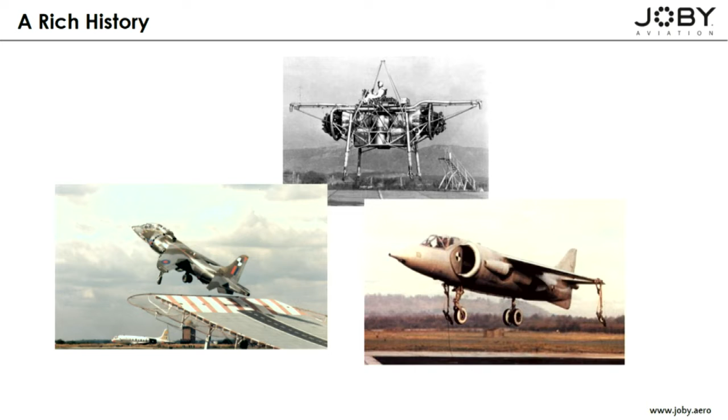So with that said, let's start with the story of the flight control system for the F-35. Of course, the UK had a long history of research and development in VTOL. You can see the flying bedstead there at the top, and then of course the P1127 bottom right, leading to the Harrier. The Harrier was a huge triumph in aviation, arguably the only successful STOVL fighter, or VSTOL fighter, certainly the only successful one in the West. And the great news about the Harrier was the simplicity of its engineering, that with only one extra lever in the cockpit, as my mentor John Farley used to talk about, the addition of only one extra lever turned a regular fighter from a flight control perspective into a vertical takeoff and landing aircraft. Tremendously ingenious mechanical engineering throughout that vehicle, not a digital computer in sight.

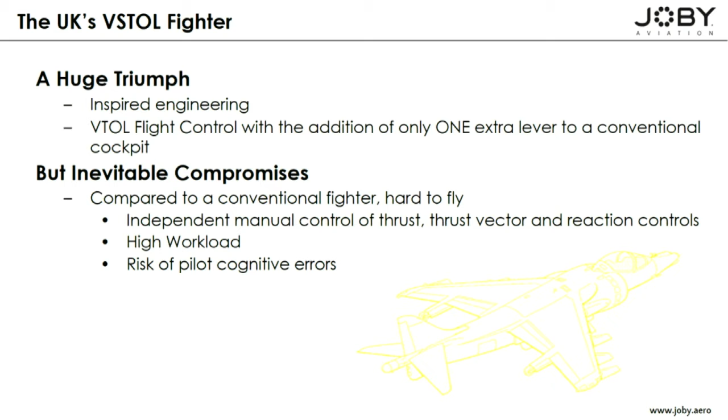But there were inevitable compromises in the aircraft as a result of this. The pilot had independent manual control of the throttle, the thrust magnitude, and the thrust vector angle, the nozzle lever. So it was a high workload aircraft with the risk of cognitive errors being made by the pilot. And you're going to see one here. This is an air show about 10, 15 years ago. A very experienced pilot, the squadron air show display pilot, in a 100% serviceable, functioning Harrier off the south coast of England. Nothing wrong with that aircraft at all until now.

So a perfectly good aircraft thrown away by an experienced and capable pilot due to cognitive error. He pulled the throttle back instead of the nozzle lever. Sounds like an obvious error to avoid, doesn't it? But he's not the only person to have done it, and it's not the only form of cognitive error.

So we have a great capability in the Harrier, or had, but we had an accident rate in the takeoff and landing regime that was an order of magnitude higher than the accident rate for equivalent conventional takeoff and landing fighters. A 10-fold accident rate for takeoff and landing.

We had a significant training burden. The Harrier training course, you came out of the training system with your wings, went to the Harrier. It took 8 months to graduate as a Harrier squadron pilot. Compare that to equivalent conventional fighter aircraft, about 3 months, 3.5.

So significant training burden. And then we carried operational limitations, both in terms of having less good weather minima compared to, for example, a helicopter, which you could argue might have similar weather minima, but we were less able to cope with bad weather in the Harrier because of the high workload.

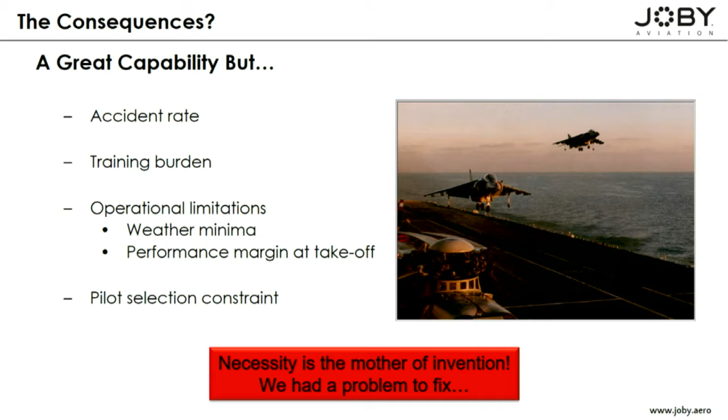So necessity is the mother of invention, as the proverb goes. We had a problem to fix. And so we, the US and UK governments, that were both operating Harriers by the 1980s, set out to fix it. I picked up this program in the mid-1990s.

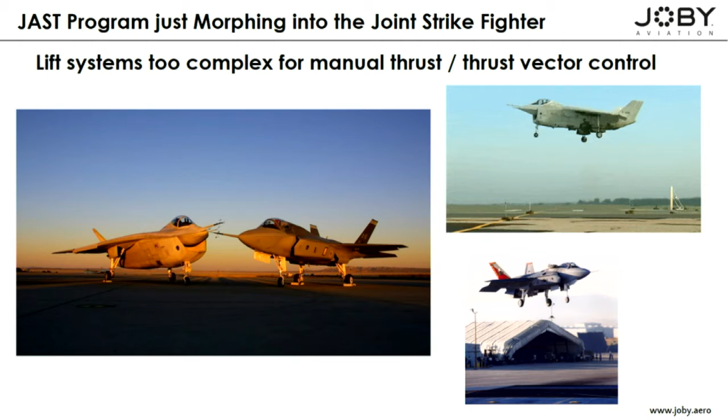The Joint Affordable Strike Technology Program was just at that time morphing into the Joint Strike Fighter Program, where we were going to have complex lift systems that were going to be digitally controlled. There was no option anymore for a simple mechanical lever between a nozzle lever in the cockpit and the thrust vector angle.

But we didn't start from scratch. There'd been a lot of work done through the 80s and early 90s. But from 1986, for 10 years, there was a joint aeronautics program between NASA and the Royal Aircraft Establishment in the UK, both countries pursuing VSTOL, advanced flight control research. Shared facilities, shared data. You see at the bottom there the NASA VSTOL systems research aircraft, and to the right, the VAAC Harrier that I'll be talking about a little bit more.

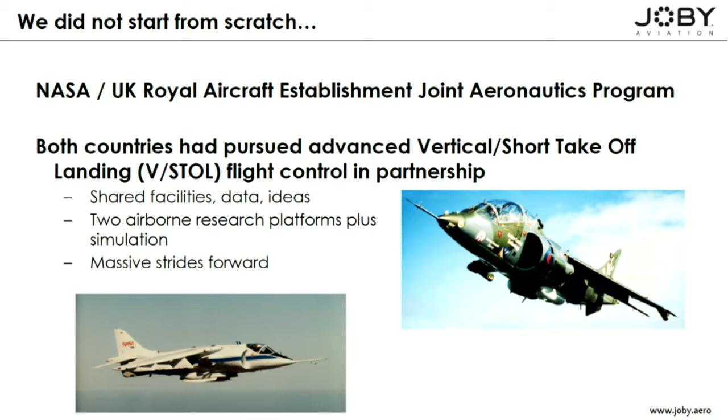So up until 1996, when I'm going to pick up this story, there'd been a lot of work done. And what had we learned in that period of time? What did we know already from the research that had gone on up until 1996? The first thing we'd learned very, very clearly, unequivocally, is that decoupled axes greatly reduced pilot workload.

By decoupled axes, I mean if you look at a coupled axis in a normal airplane, if I push the throttle forward, I go faster, but I also climb. So the axes are coupled. And what we found is by decoupling the axes, so if I make a command to the airplane to go faster, my flight path doesn't increase. I don't have to retrim as I go faster. By decoupling the axes and allowing the pilot to handle one axis at a time effectively, we greatly reduced his workload.

We also found that higher levels of augmentation reduced workload significantly. And by that I mean you give the pilot control of the output variable that he's intending to control. So you give the pilot direct control of speed or acceleration, or you give him direct control of flight path angle or flight path rate, according to the task at hand. You'd never want to give him control of the elevator or the ailerons and have him perform the control loop around getting the response out of the aircraft that he wants.

Particularly fine work from NASA in some of these areas, and they came up with translational rate command, which I'll talk about in a little bit, which is now almost universal in hovering aircraft, and developed at NASA Ames with some really stellar work from the guys there.

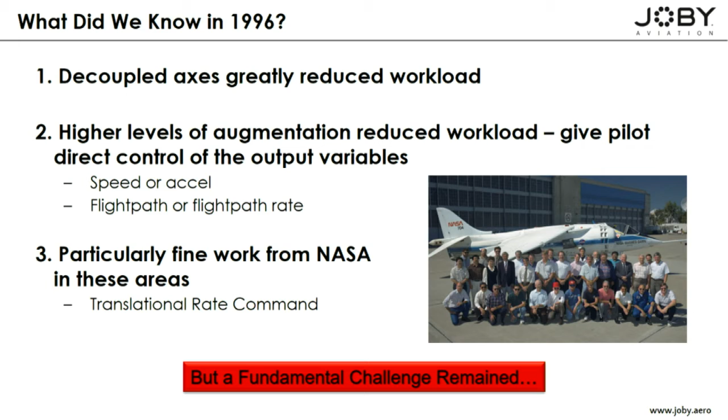So that's what we knew in 1996, but there was a fundamental challenge that remained. And that is that a VSTOL aircraft is really two vehicles in one. Hover and forward flight are two fundamentally different flight regimes, not only in engineering terms, it's obvious, but in terms of the task that the pilot is trying to accommodate.

In wing-borne flight, he has a vector to control. He's going up, down, left, right with his vector, and now how fast he wants to go. But he's controlling a vector through the air. Whereas in the hover, the pilot is now controlling a position over the ground, an XY position control with a secondary height channel control margin. He's not trying to control a vector, but a position, and in a completely different plane.

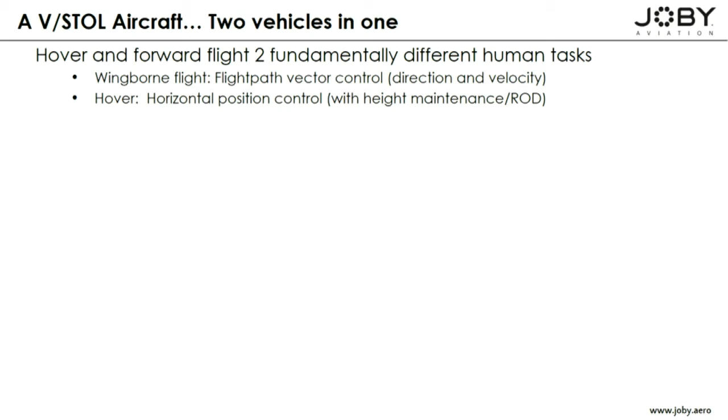We look at the flight path control plane is like this. The hover control plane is horizontal.

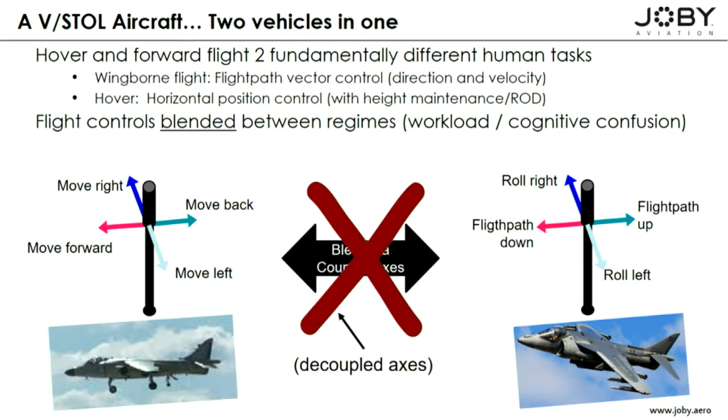It also arises in higher workload for the pilot because he's having to manage a changing vehicle, and brings cognitive confusion into the game as well. Now, as soon as we decouple the axes, we can't do that anymore, which is no bad thing because we've already decided it's a high workload task, but it also now becomes impossible. Remember, we'd already decided, previous to 1996, decoupled axes are better. Well, if we're going to decouple the axes, we cannot do what the Harrier or the helicopter does, which is a blended transition with both axes being coupled.

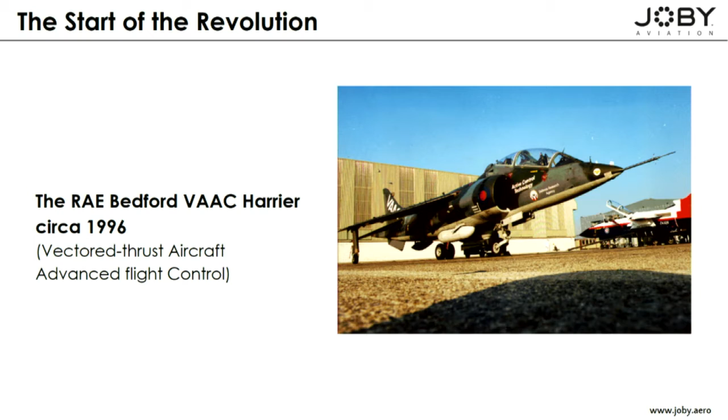So this is the aircraft that we did the work on, the Bedford VAAC Harrier. It stands for Vectored-thrust Aircraft Advanced flight Control, with a soft small T and F to make it an acronym that's pronounced VAAC. That's about 1996, before the color scheme was changed, and that's actually at Boscombe Down after it moved there in 1996. Fairly ordinary on the outside. It's actually the oldest two-seat Harrier still in existence, built in 1969, one of two original development batch two-seaters. After it finished its work with Hawker Siddeley, it was given to the Royal Aircraft Establishment and became a research aircraft.

And of course, the magic's on the inside. It's just a regular Harrier on the outside, and you have a rear cockpit there. That's the rear of the two cockpits, with a variable feel center stick - we later installed an active side stick - and a left inceptor quadrant that could be pulled out. By inceptor, by the way, I'm just talking about a throttle or a stick, something the pilot holds to make inputs to the flight control system - these are generically called inceptors.

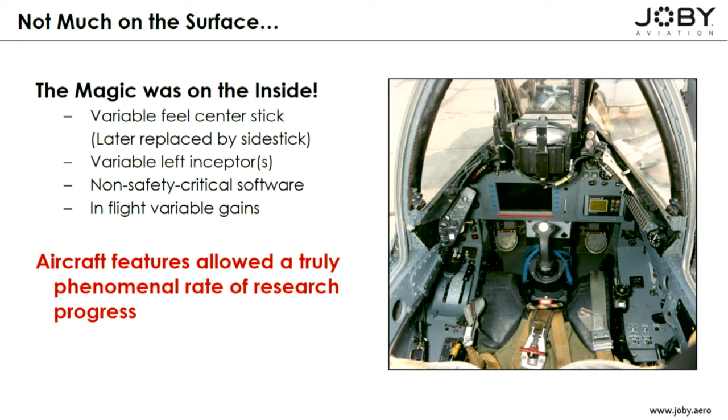But the main thing about it was that we had non-safety critical software. So we could not only turn around a software build in the morning, load it on the airplane and go fly it immediately without any regression testing or safety testing, but actually in flight, we could sit in the rear cockpit flying in the hover and adjust parameters within the flight control system. We could vary a feedback gain, a command gain, or anything else we wanted, turn features on or off, real time in flight - made it very, very fast to make progress. We just can't do that with normal flight control, with all the safety mitigation and regression testing required every time we roll software. But a very, very flexible tool.

So what then did we do with it? Remember the fundamental challenge I introduced a couple of slides ago is linking the hover with wing-borne flight, and doing it in an intuitive, low workload manner that works for the pilot. How do we link the hover and wing-borne flight regimes in this kind of aircraft?

Well, we identified candidate solutions. So we did a lot of brainstorming. We looked at the work that had been done before and the different implementations. We looked at different aircraft types. Of course, most of the mechanical had some kind of coupled axes, but we could still draw lessons from them. We came up with essentially two main types - there were actually three to start with, and we threw one out after fairly early flight testing.

And we ended up with two fundamental overarching solutions. You either change what you do between the two regimes - so you might have a conventional fighter, fast, slow, up, down in wing-borne flight, and then when you get to the hover, somehow you engineer a change so you've now got up, down on the throttle like a helicopter or Harrier, and left, right, up, forward, back on the stick. Without going into further details - it'll be in my written paper - you have to introduce a third inceptor to do that. But there is a way you can do that with decoupled axes if you introduce a third inceptor. Or you go for something different.

You go for something where you unify the response of the aircraft to the cockpit inceptors, irrespective of speed. We called it Unified Flight Control. It was actually invented in 1980 by Peter Nicholas, one of the guys that worked a lot on the Joint Aeronautical Program.

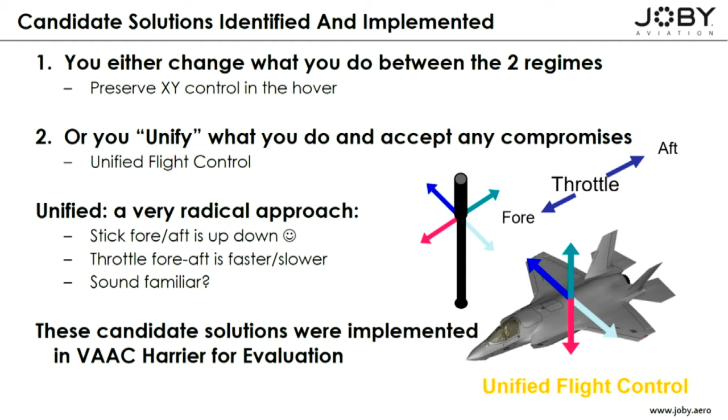So these candidate solutions were implemented in the VAAC Harrier for evaluation, and this is the key: the experiment was piloted evaluation of handling quality tasks. When you do a piloted evaluation of tasks, it's very important to get the task and the experiment set up right, because if you get it wrong, human beings are very subjective — you can easily swing the results one way or the other. So the task definition is crucial.

You have to come up with a task that is, number one, relatable to the mission or role the aircraft's going to have — representative, not some kind of artificial task. And you need to generate a task where the pilot will be operating in what's called high gain. A human being has a gain in the same way a control system has a gain, and human beings can become high gain controllers in different environments — normally when the visual cues are more compelling, or when there's more stress, or when there's a tighter tolerance required on human performance.

We need to go to high gain because it's high gain tasks that elicit the deficiencies in any control strategy. We needed to make the tasks representative, but also ones which would test the parts of the flight control strategies we were looking at in the most demanding way. We wanted to probe the weaknesses in each of these strategies.

We used an industry standard scale, the Cooper-Harper Handling Qualities Rating Scale, designed in the 1960s in a NASA report — very much industry standard, nothing particularly new there. And we used multiple test pilot evaluators. Trained test pilots are trained to be objective, at least as much as possible, and we had both Harrier-experienced and non-Harrier-experienced test pilots flying these tasks.

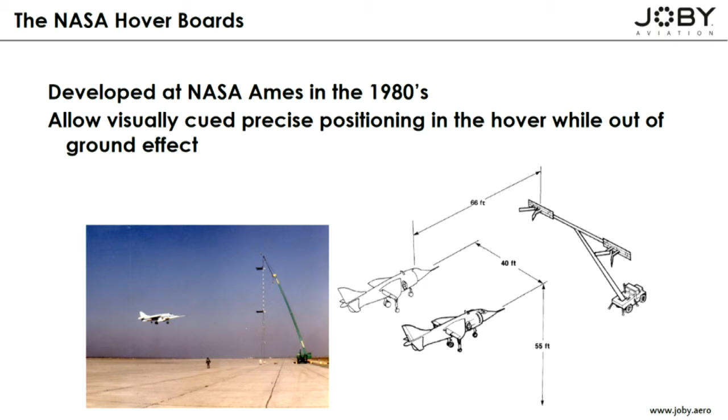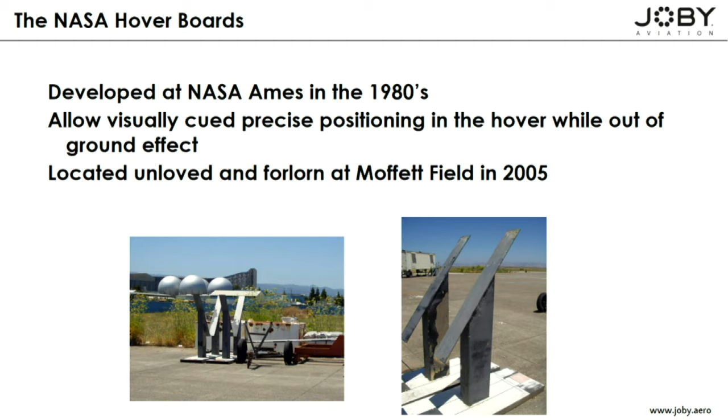And we found them on a dusty corner of Moffett Field, looking a bit sad and unloved. We shipped them over to the UK in a US Navy C-130, painted them up, and put them back into action, which was rather nice to do.

And we also took the vehicle to sea. Her Majesty's Navy gave us access to HMS Invincible on a couple of occasions, so we were able to perform tasks at sea as well. The advantage is that the task is naturally high gain on a rolling, pitching deck at sea — you've got superstructure very close to you, you're much lower and closer to the deck as you come across it, and it's a much higher gain task for the pilot. So it was a great place to evaluate our control strategies and compare the two we were looking at.

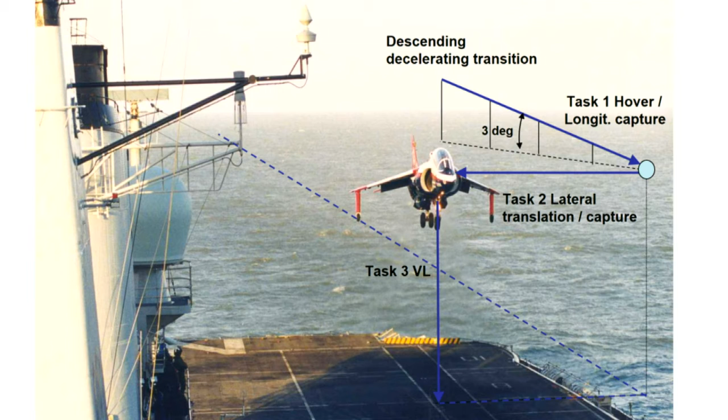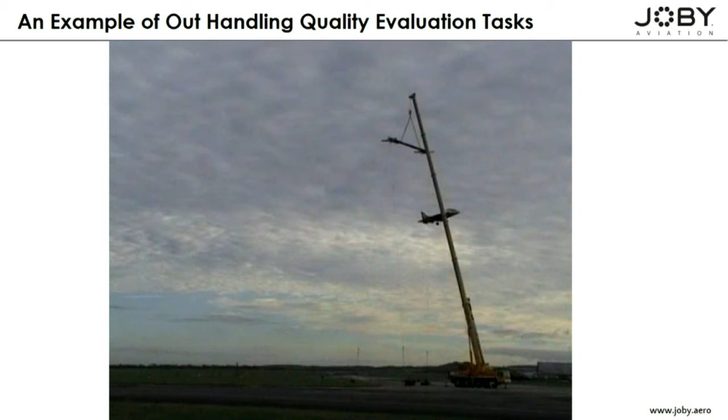And there were different sections of tasks. This first task was basically a longitudinal position capture, simulating coming into the hover and stopping abeam the beam, if you like. The next task was a lateral position capture, and you'll see the aircraft in a moment cut across and capture those targets.

There's a lot more noise in real life, of course. This is before the era of GoPros and so on, so we had to put a camera at the top of that beam. Then there's the problem of remotely switching it on. Back in those days, we couldn't remotely switch the camera on, so we tried to persuade one of our flight test engineers to go up onto the top of the crane and the beam, but sadly he refused, so we just left the camera running.

In a moment, you'll see the aircraft begin its descent to the pad. That shows about 3 or 4 tasks the pilot was undertaking, and we'd run him through identical tasks using the different control strategies. He's now just positioning for a final landing, which you'll see in a moment. On this final landing, the intention is for the pilot to put his head in the middle of the square pad you'll see in a moment. So it's not to put the vehicle in the middle, but he's trying to put his head in the middle of the pad.

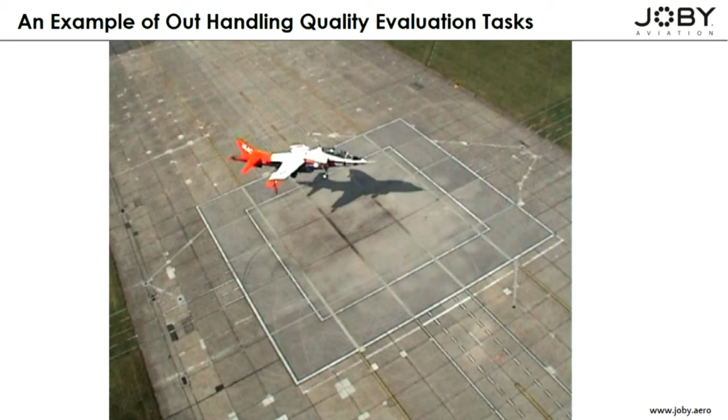So what results did we get? In those few minutes of talking, of course, were years of effort and millions of dollars of our respective governments' money. Unfortunately, with limited time, I can't go into a lot of the details, but I will attempt to put them in the written paper. The summary, cutting to the chase here, is that the results strongly endorsed unified flight control.

We anticipated difficulties with unified control for the XY position control in the hover. Everyone said it's much better in the hover to have XY position control on one inceptor—go forward, back, left, right, or at a 45-degree angle. Very intuitive, very simple. If you split them between 2 hands, forward and back here and left and right here, that's going to be harder. Well, we simply didn't see that as a challenge. If there was a degradation in handling qualities or increase in workload, it was very, very small, and easily outweighed by the massive cognitive advantages of the simplicity of the control strategy.

The pilot knew whatever speed he was at, or if he didn't know what speed he was at, he knew that if he pulled back on the stick, his flight path would go up or his height would go up. And if he pushed forward on the throttle, he would accelerate along the flight path vector. So this was very strongly endorsed and backed up by a wealth of in-flight research data that, as I said, I can't really give you a lot of the meat and potatoes of in this presentation.

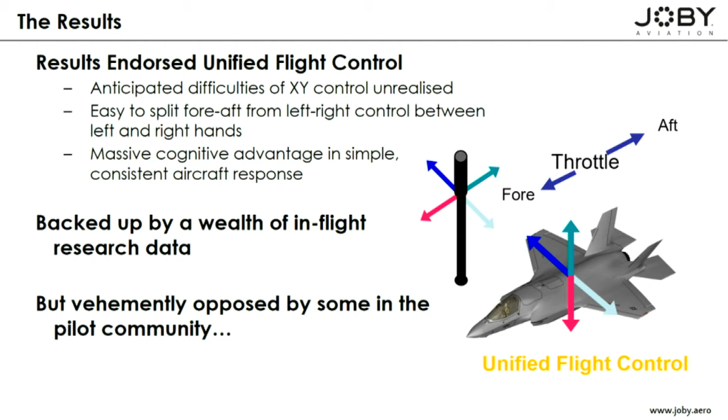However, it was vehemently opposed by some in the pilot community. And this is turning to the topic I'd like to cover through most of the rest of my presentation, because this is a really excellent example of predisposition and paradigm. This was vehemently opposed by some, and a bitter debate ensued as a result of it.

The legacy control community, if I can call them that—people who were used to helicopter and Harrier-style controls—just couldn't accept that they could get away from an XY control in the hover on the sticks. They can do a 45 left or right, and everything's nice and intuitive on a single stick. They couldn't understand: I pull back on the stick and the engine spools up—that makes no sense at all. And if I want to do a 45 translation, I've got to use 2 hands. So these were the sort of arguments raised, and there were some that would not be persuaded.

After 2 or 3 years of fairly emotional debate—and it literally was 2 or 3 years as the results and data came out—many of these pilots who argued against it were our subject pilots in the experiment as well. A grey beard panel was convened by the Joint Strike Fighter Program Office in 2002. We took 3 or 4 days presenting our various bits of data, and those arguing for other ways presented their data, and eventually, at the end of that week, unified was chosen. But it did feel a little bit like this much of the time.

The question, though, is, were we right? And of course, the jury is now in. The F-35B has been in operation for some years, and I'm going to cover that in just a moment.

Before I do, though, I'm going to show you a bit of footage, and there is some sound on this. I'll let the pilots chatter away, you'll hear they're quite happy. This is Peter Wilson, who's been flying the F-35 the last 10 years, and has just joined Joby Aviation as well. And Chris Gotka, Sea Harrier test pilot, who's the safety pilot in this evaluation. So Pete Wilson is the subject pilot, and Chris the safety pilot.

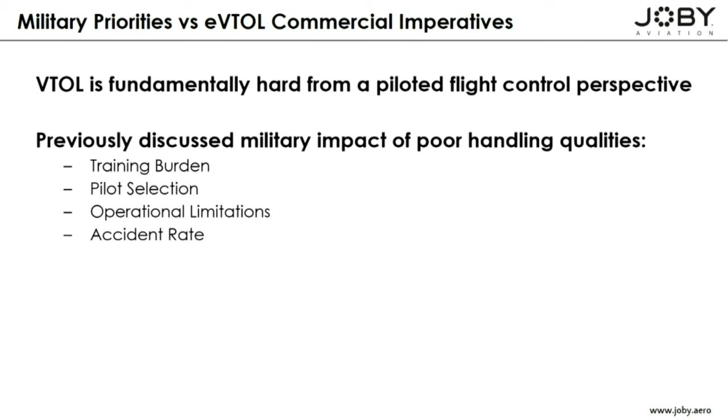What does what we did before mean for eVTOL? We talked earlier about military priorities, and in urban air mobility we've got commercial imperatives. VTOL is fundamentally hard, we already established that from a piloting perspective. And those issues we talked about the military facing - training burden, pilot selection, operational limitations, and accident rate, especially the last - apply even more so in the civil world of urban air mobility. So we have an even greater imperative than the military did to do this right.

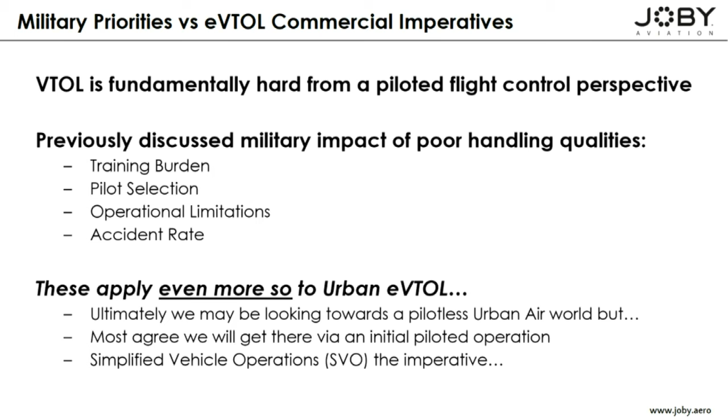People talk about autonomy, and we are moving towards autonomy. Who knows when? We can all have our different estimates of when we'll have autonomous vehicles flying passengers. It'll come at some point, but there's very few who would argue we're going to start with autonomous flying taxis. We're going to start with piloted flying taxis. Simplified vehicle operations, mitigating those problems inherent to a high workload task such as VTOL flight, are absolutely essential for us in the industry.

It's interesting to note this is not just about VTOL. These concepts of highly augmented control, of giving the pilot direct control of the output variables he needs to control for that task, are spreading throughout aviation.

In the US Navy, we have a flight control strategy named Magic Carpet. This was developed by one of our colleagues on the VAAC Harrier research program. He simply turned the same concepts to a new problem - he took the same ideas we'd proven and developed in the VAAC Harrier for the hover and applied them to the task of landing a fighter aircraft on a moving, pitching, rolling ship at night, which was, until very recently, by far and away the hardest piloting task in the world.

So hard that highly experienced pilots, friends of mine in the US Navy, would go off on a mission, real or training, and if at night, coming back to the ship at night, they'd spend basically the whole hour and a half of their mission worrying about what they had to do at the end of the sortie. That might sound extreme, and everyone's a little different, but there was this significant threat hanging over you. You've got to come back to the ship at night where you can't see anything except this little dot of light, and you've got to close the loop around your glide slope using intuition and raw handling skills.

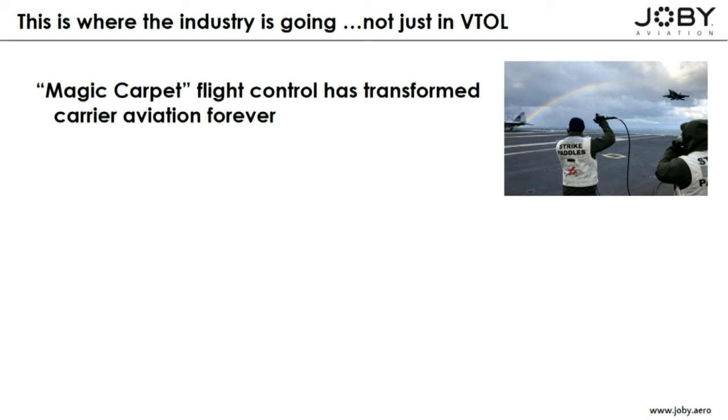The FAA are conducting groundbreaking research, and the EasyFly concept in Flight Level Engineering's variable stability aircraft there, designing not for the pilot but for the operator, for someone who's not a pilot to come in and operate an aircraft safely and easily, radically transforming the ease with which someone can learn to fly an aircraft safely.

So in this context, how can we be thinking old school? How can we be thinking about the way we've been operating for the last 20 years, or even the last 10 years with GPS perhaps? There's still lots of things we're doing where we're denying the pilot the ease and safety that we could give him.

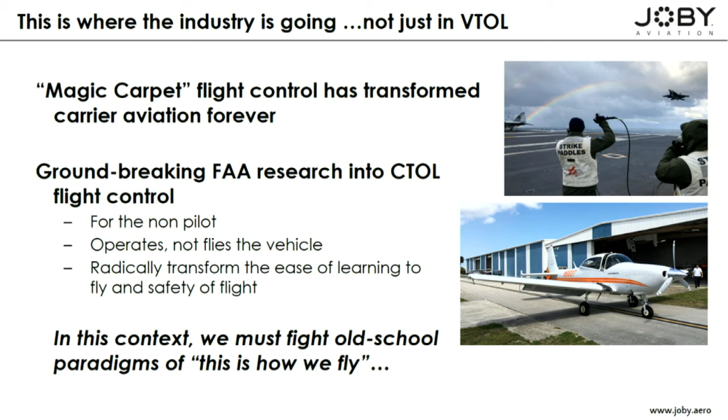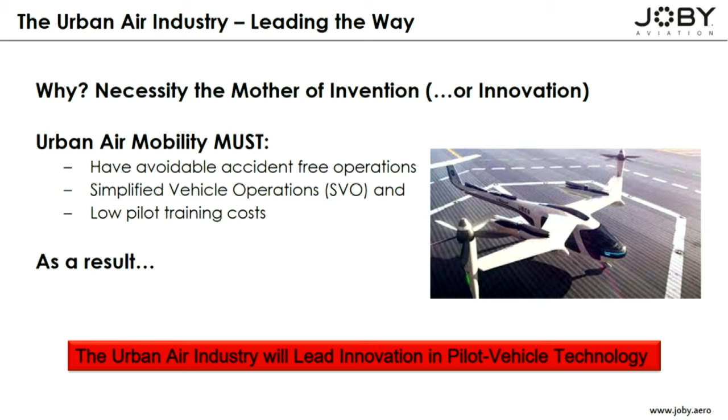Because necessity is the mother of invention, as I mentioned earlier, we had a problem with the Harrier, so we solved it for the F-35. Well, we've got a problem in urban air VTOL because we've got to do it safely, we've got to do it cheaply, we've got to do it robustly. And so as a result, it's my prediction that the urban air mobility world will lead the way in future PVI development, pilot vehicle interface development. Because we're doing it, Joby Aviation's doing it, our colleagues and competitors are doing it too. And it's very pleasing to see, again, because we have to, that we're going to be leading the way in that area.

But the last part of my talk, and I'd just like to touch on part 3, is what about the future? With what we've learned both on the Harrier and the F-35, and with what we've learned with Magic Carpet on the US Navy, and what the FAA are doing with the EasyFly concept, does the CTOL or the Part 25 world now have a challenge to face up to?

The counterpoint is we don't have a problem. Commercial aviation is the safest form of transport on the planet. And it's true, and it's an enviable track record and something to be very proud of. I heard a very senior person in the FAA, just within the last week or two, quoting that in the last 10 years in the National Airspace System there have been 7 billion individual journeys, 90 million commercial flights, and 1 fatality, which actually is not quite true, but let's just say it is.

Is that a relevant statistic? Because you need look not very far to find them. You need only look outside the National Airspace System to find, in last year alone, 534 fatalities. Air France 447 in the South Atlantic, the very famous and tragic crash just 10 years ago this month. So these accidents, they may be outside the US National Airspace System, but they're in our aircraft. They're in US and European manufactured airliners. It's our problem. Not all of them, but a fair chunk of them.

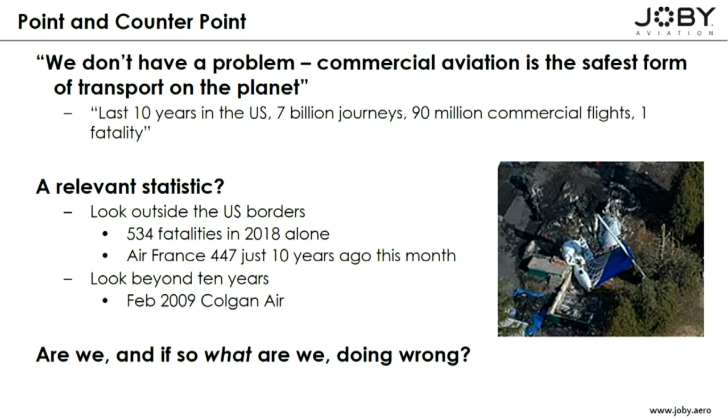And if we look beyond the 10-year point, it was only February 10 years ago that the Colgan Air commuter airline crash happened, when the pilot had a stall warning and pulled back on the stick and pulled back on the yoke in the stall. So I don't think the problem is solved. Yes, it may be the safest form of transport, but we can make it safer still. So if we're doing something wrong, what are we doing wrong?

Well, I think what we're doing wrong is fundamental to the challenge of automation. We need to consider not just the flight control system I've been talking about so far, but the pilot-vehicle interface in general. And with automation, we've made the flying task in a Part 25 airliner really, really easy, 99.9% of the time. And as a result, we've dumbed down the pilot. This may be controversial, but I'm afraid it's true. We have dumbed down the pilot by making his task easy.

You know, call sign ABC, proceed direct, Sierra Foxtrot Oscar. What's he do? That's how we fly today. Call sign 1234, you're cleared the ILS approach runway 28 San Francisco. It's already in the FMS. So we've dumbed down the pilot. And yet when things go wrong, we expect him or her to save the day. It's a deep flaw. Sometimes we get away with it with some exceptional skill, Hudson River. Most of the time we don't.

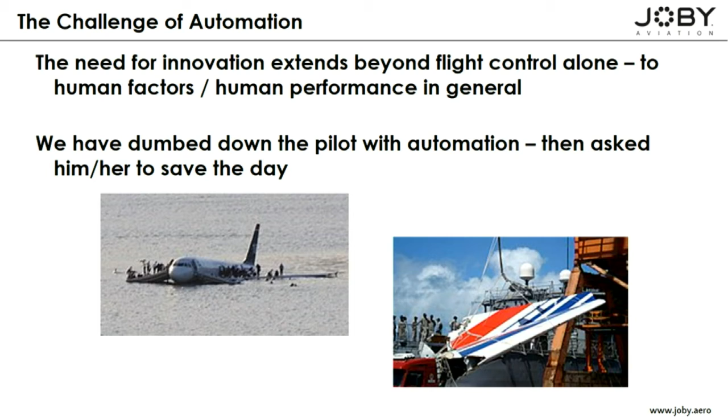So is the solution, as some people are saying, and as some have been saying for years now, to limit automation and give more back to the pilot? So we bring his skill level back up? Absolutely not. That is the dumbest response to what we've seen in these areas.

No, the solution is to do automation right. Is to automate, but to finish the job. The argument is not against automation, it's against partial automation. We can save the pilot from him or herself. We can, as I like to say, wrap the pilot in cotton wool to prevent him or her making the errors that we know people make.

For example, we still have direct link modes in our airliners today. So we have a nice super-duper fly-by-wire flight control system, but if some sensors fail, we drop back to a direct link, a manual flying mode kind of concept. And yet we've been flying 40 years with the F-16 without any fallback manual flight control system. Now every military fighter has full-up fly-by-wire with no direct electrical link, no manual fallback. So why are we still putting it in our airliners?

And we still fail to protect the pilots. I just talked about wrapping him or her in cotton wool, but we still fail to protect the pilot from all the mistakes we know human beings make. A pilot can still run himself or herself out of fuel, fly into the ground, get too low on energy, or just ignore the GPWS.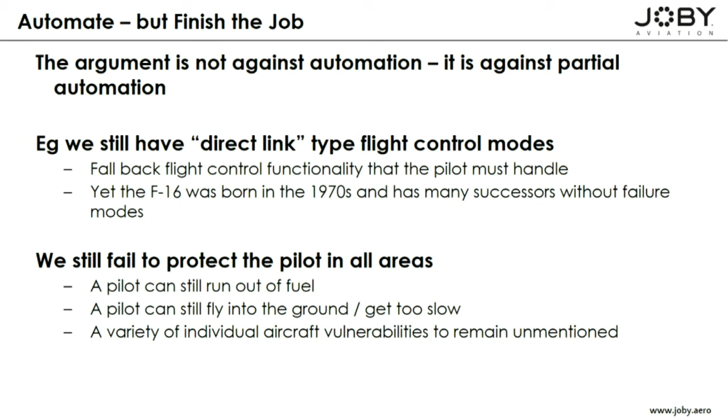But we're failing to protect the pilot from him or herself fully. But we can do so. Full protection is realistic. We understand the human being, and we understand the mistakes and errors that a human being can make.

With digital computers today, and the incredible power we have in them, and the knowledge that an aircraft can have about not only itself but the world around it, makes all of these things practical. We already have the ability to wrap the pilot in cotton wool. It's just a case of approaching the design intelligently with the right objective. In the same way the US Navy approached the carrier approach task and turned something from the hardest task in aviation to something pretty straightforward, by taking intelligent design and digital computers and applying them to the task. And we can do that today.

The disincentive: I was told this by a just-retired, very senior executive from one of the two large Part 25 manufacturers. I won't say which one, obviously. He said the customer doesn't want it. All these things we could do, the customer doesn't want it. So we supply what the customer asks for.

And I think that's poor. It's legacy thinking. It's just like the pilots who, back in 2002, didn't want to accept there was any other way to hover an airplane than having XY control on the stick. We've got people saying, well, this is how we do it. No, this is what I'm used to flying. This is what I want it to look like. This is how I want my autopilot panel.

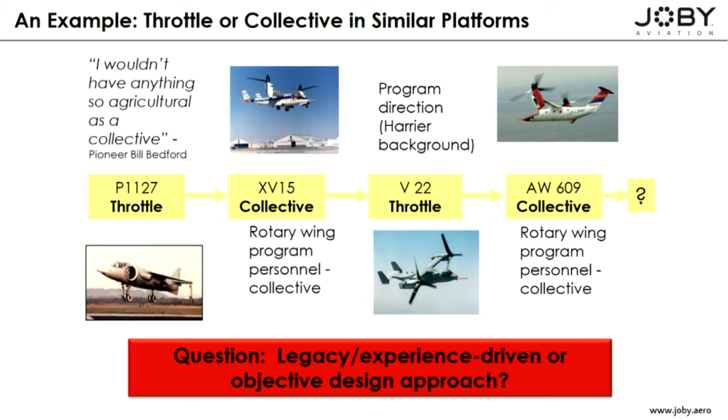So what's going on here? Is this intelligent, objective design, or is it just legacy experience driven? Is it just depending on who your test pilot is, what kind of flight control system you end up with? I make no judgment of which is right or wrong here. I just use it as an example of the extraordinary influence of pilot preconception or customer preconception, and the impact it can have on our design.

So I think we should move forward together. The time is overdue to take a radical approach to the role of the human in the cockpit, and to apply the digital computer and our knowledge of the human being to the task. We can do it all now. We have the potential to do it all and fully protect the pilot from him or herself.

The urban air industry has no choice. Joby Aviation and our colleagues and competitors are all pursuing innovative, advanced pilot vehicle interfaces because we have to for our commercial goals. My fervent hope is that we can move forward together as an industry throughout, from general aviation to Part 25 and everything in between, because there's work to do, and actually it's not that hard. It just requires some careful, objective thought and intelligent design.

I'm going to finish with a little video called If You Do It Right. It's a video of a news program, the national news in the UK, where we had a science editor for the news channel come out and fly the VAAC Harrier. It's quite entertaining, and I'll finish on this note before wrapping up.

The RAF claim that flying the latest Harrier jump jet is as easy as driving a car. We were a bit doubtful, so to put it to the test, we sent our science editor, Lawrence McGinty. Lawrence actually can't drive a car, but despite that, they still let him loose at the controls of a multi-million-pound jet fighter. Here's what happened when Lawrence became our very own Top Gun.

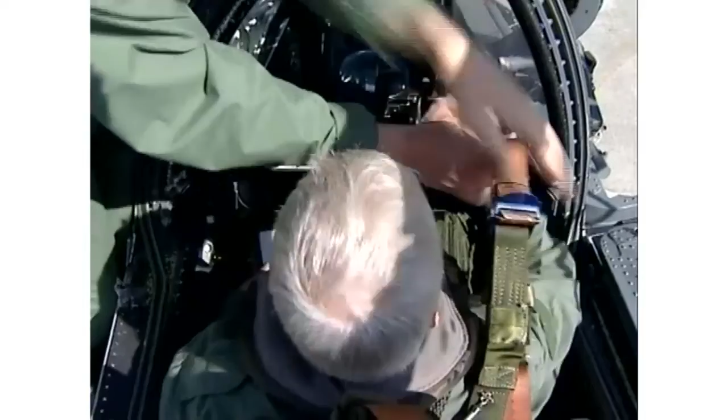I walked across the tarmac with test pilot Chris Gopka, but I still couldn't believe it. They were going to let me fly a Harrier. As they strapped me in the rear cockpit of the two-seater experimental plane, I kept telling myself the new control system made flying the Harrier easy. I'm fat, I'm 50, I'm trussed up like a chicken, I can't even drive a car, but I'm going to have a go at driving this. It was reassuring that Chris, who's flown Sea Harriers for ages, could take control instantly if I screwed up big time. He flew the takeoff, and it took my breath away.

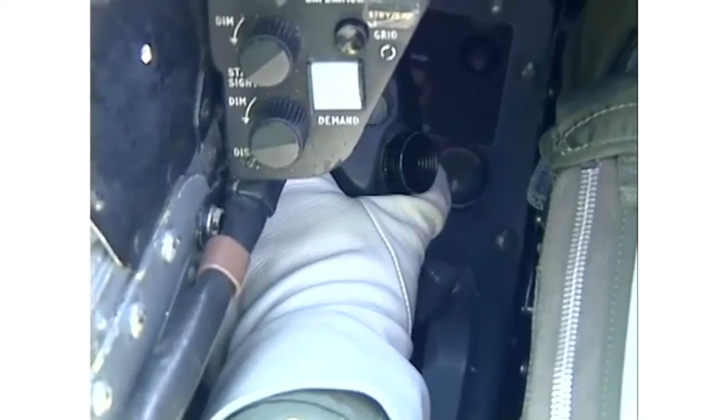Oh my God! Only a few minutes into the flight, Chris hands control to me. Press and hold, this is the engage button now. Engage, yep, I'm pressing and holding now. Okay, you have control of the aeroplane. If you want to, just push the nose down a bit. The new system is easy. Push forward on the left grip to go faster, pull back to slow down. On the right, forward to go down, backwards to climb. Left to go left, right to go right.

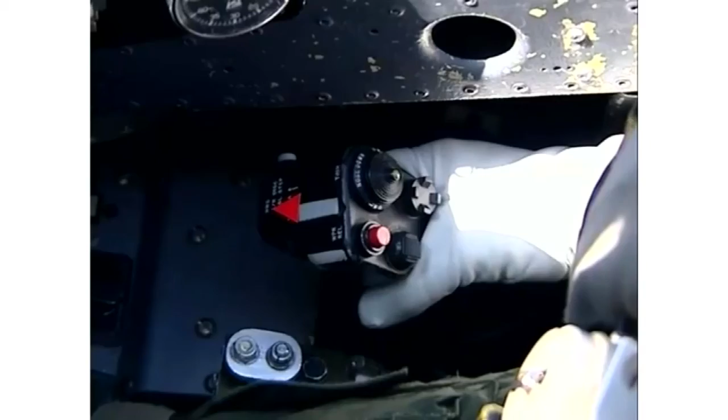After 5 minutes of flying the Harrier, then came the tricky bit, bringing it into a hover and landing vertically. Here we are, we're jetborne in an aeroplane, which is quite spectacular, and we're at 100 feet. So all I need you to do now is push forward on the right stick. Okay, just ease off on that rate of descent, thank you. Just keep coming down there. There you go, that's perfect. We're on the markers, or close enough for me to be happy. Keep coming down, keep coming down, keep coming down.

And you've got it now. I've got it now. Many congratulations. I don't believe it. That was, oh, wow. Very well done. How do you find sex interesting after this?

He was a real character, a very good presenter.

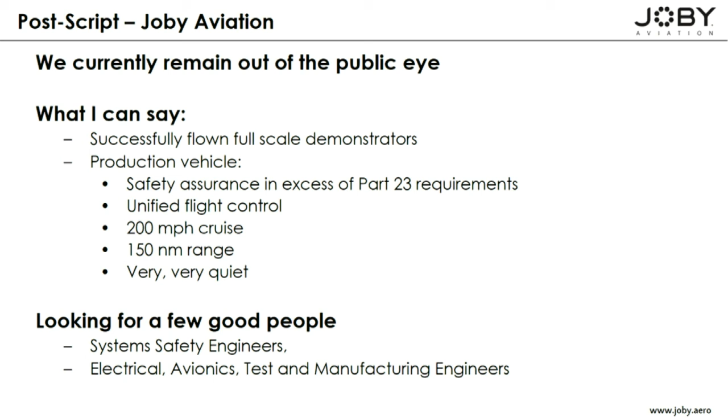What I can say is we've successfully flown full-scale demonstrators. Our production vehicle will have safety assurance in excess of Part 23 requirements, obviously unified flight controls. We'll do a 200 miles an hour cruise, 150 nautical mile range, and it'll be very, very quiet. We are looking for a few good people, particularly system safety engineers to help us do what we've been talking about, plus electrical avionics, test, and manufacturing engineers too.